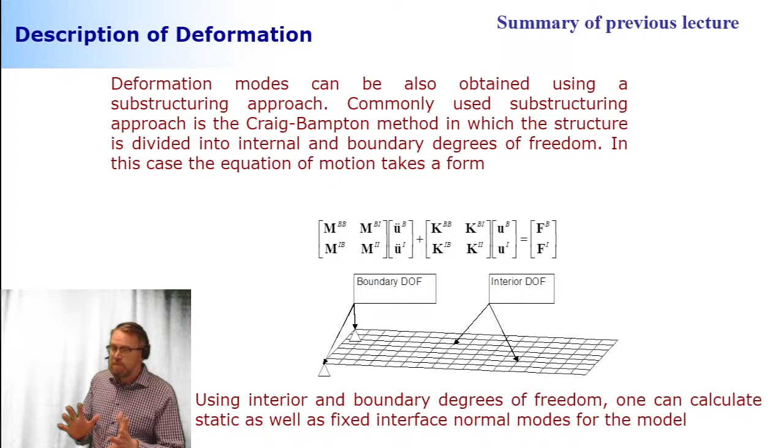Based on the reorganization, it computes two sets of deformation modes that describe the way the structure can deform: static correction modes and the modes obtained by using the eigenvalue analysis. These are described here in this algorithm in our upper left corner.

The first set: you set the point of interest fixedly attached to ground, and then conduct the eigenvalue analysis to see how the rest of the degrees of freedom—the interior degrees of freedom—vibrate when you keep the boundary degrees of freedom fixed. This is the first set of modes you can get.

The second set is the static correction modes, where for each of the boundary degrees of freedom you impose a unit displacement, one at a time. That's the other set. There's a minor, beauty problem—not very significant in my mind, but some people feel it's not good and can't live with it—which is that the static correction modes are not mathematically orthogonal.

So what's the big problem if they're not orthogonal? Well, the big problem is that when you use them to compute the reduced size stiffness and mass, the result is not diagonal.

That's the only drawback. Is that serious? I don't think it is, because what matters more than the diagonal shape is the reduced size. If you can come down from 100,000 degrees of freedom to 20 degrees of freedom, that's what really matters, not so much the fact that your mass and stiffness is not diagonal.

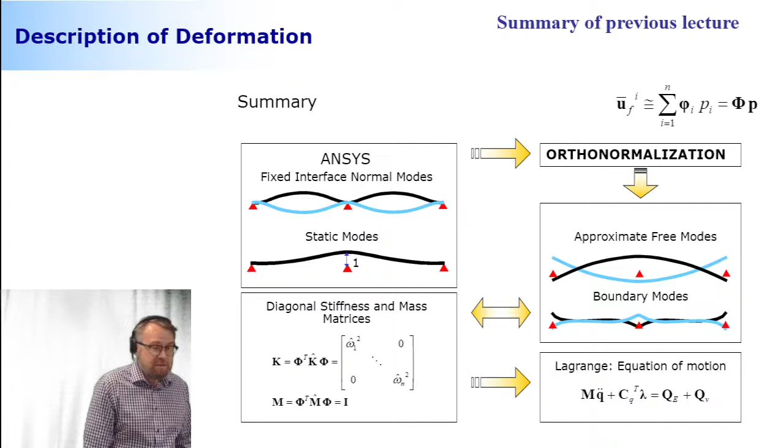Something more chaotic means they have approximate free modes, and then these boundary modes, which are very local deformations associated with the point of interest. Anyway, that's what you can use, and now this is something that's orthogonal. So once you multiply your stiffness, now reduced size stiffness and mass, you get the diagonal representation. That's the end of the story, that's how it goes.

So hopefully this noise isn't bothering us too much. We learned that once you have a flexible body, you can get information about strains and stresses as a post-processing procedure, because what we're computing in multi-body system dynamics is first the modal coordinates. Modal coordinates multiplied by the corresponding modal matrix give us nodal degrees of freedom. Nodal displacements are not yet strains or stresses, but we can use them to get the strains and stresses.

There are two alternatives to make this happen. We can use the modal stress matrix coming from finite element method, and using that information, automatically get the strains and stresses in multi-body software. Or, more complicated, we can take all the forces obtained during the dynamic simulation, extract them, use them in finite element software with multiple load cases, and using those multiple load cases, produce a deformation again in finite element modeling.

This second approach is very complicated, not recommended, but still sometimes used, because the first one, based on the modal stress matrix which needs information about the kinematic matrix, sometimes this information isn't available. Why? Because typically commercial software is used, and it may not give this information openly to users, since the kinematic matrix is typically in numerical forms, not that easy to deal with, so you might not get it.

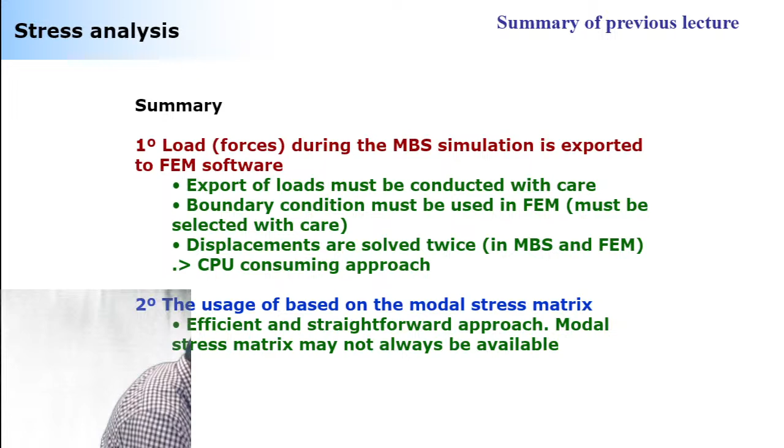So what can we do with that? We can create stress histories, and we can in turn use those in finite element fatigue analysis. Like I mentioned two weeks back, fatigue is a statistical thing, so we can get probabilities about how large a percentage of the details will last under a loading history like this.

It's not that we can definitely say you load this 10,000 times and for sure this is going to cause fatigue crack damage large enough that the structure will fail. That's not going to happen. But a certain percentage of structures similar to what you're looking at will get this damage. So statistics play a role all the time. This is good to keep in mind.

Fatigue is a big problem, particularly when you're welding structures together. And there are two big reasons for that. Actually, there are three reasons, but two major ones.

The first major reason is that because of the welding process itself, you can introduce an initial crack to the welded joint. It's not going to be very big, but for sure there's going to be something there. This is because the welding process itself is not an ideal process. When you take a very close look at a welded joint, you can see something that is not perfectly made, and this acts as an initial crack.

Now, if you want to improve the fatigue life, make the fatigue life longer, the way you can do that is to go after the welding process and use different kinds of post-treatment processes on the welded joint.

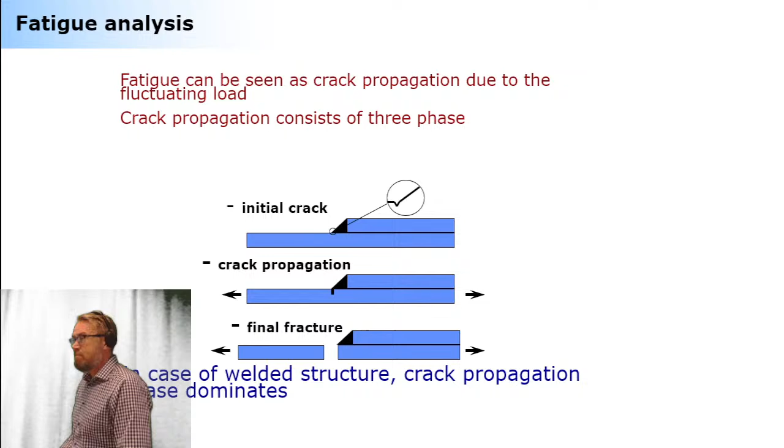Okay, makes sense. All right, then I have an in-class quiz next, and we will get back to this.

In welded structures, this is going to be—it's not on yet, but I'll put it on momentarily. So, welded structures: the fatigue life is dominated by... the dominating factor is crack initiation, crack propagation, or final fracture. Okay, this is easy. So, do you guys want to answer already?

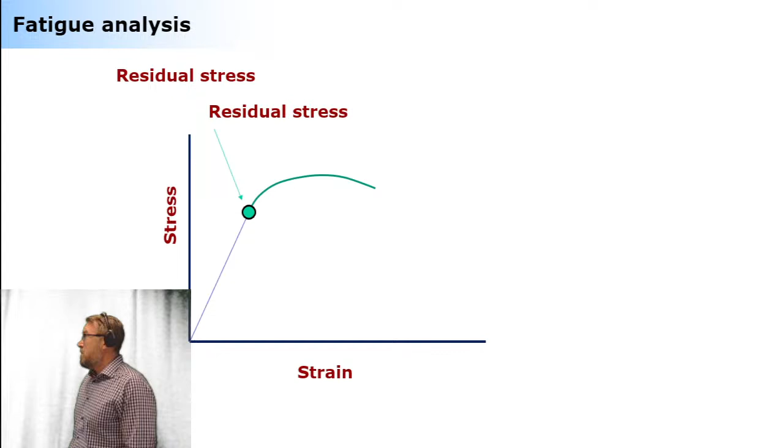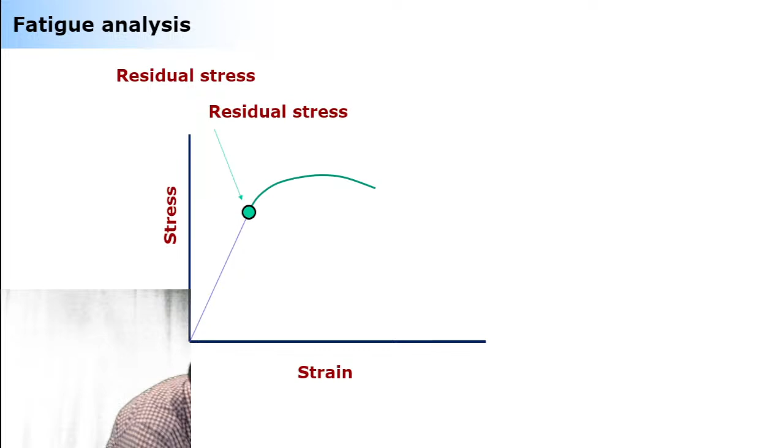This is the situation with conventional steel. How much would it help if you built your structure using ultra high strength steel instead? It helps nothing. Why? Because what happens is you just get this linear line to be longer compared to conventional steel. But that doesn't help, because the residual stress, again due to the violent way heat is introduced into the structure, still pushes you into the corner where linear behavior turns nonlinear.

Again, very locally - you don't see this when looking at the entire structural behavior, only locally. This is a big problem with high strength steel, because fatigue is an even bigger issue there. It makes it possible to build structures that are more slender and lightweight, but then dynamic loading is typically more severe than in bulkier designs. That's why most failure modes in high strength steel structures are based on fatigue, particularly fatigue of welded structures.

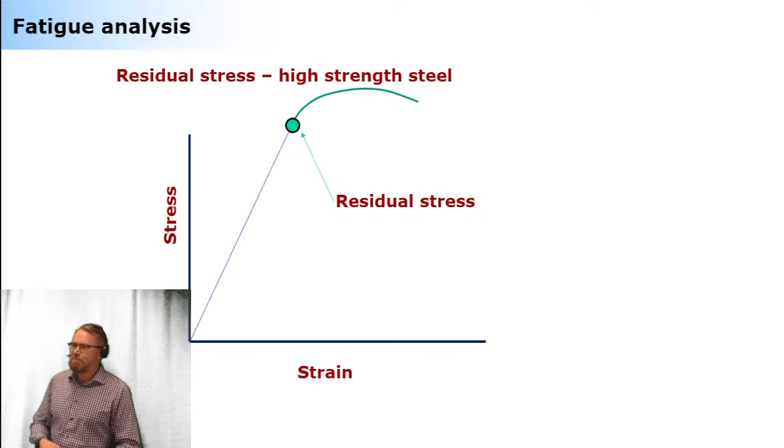So why welding? Do we have alternative ways to combine components? Yes - we can use gluing or bolts, but they're not very affordable, they become expensive. Welding is economically the most reasonable way to go. That's why. You just need to learn the way to do it properly.

This is what I meant about local high stresses, because of this local geometrical non-smooth geometry. If you really look at how stresses behave due to the geometrical change, they are typically higher than the stresses that keep the structure in equilibrium position. These stresses arise simply because of this very local detail.

These very local details are something you need to be very careful with, because fatigue prediction methods are based on the level of stresses you're able to get. If you're using multi-body models to get stress histories, you get the lowest accuracy stresses in terms of local details - these local details being the equilibrium stresses, the ones that keep the structure in equilibrium position.

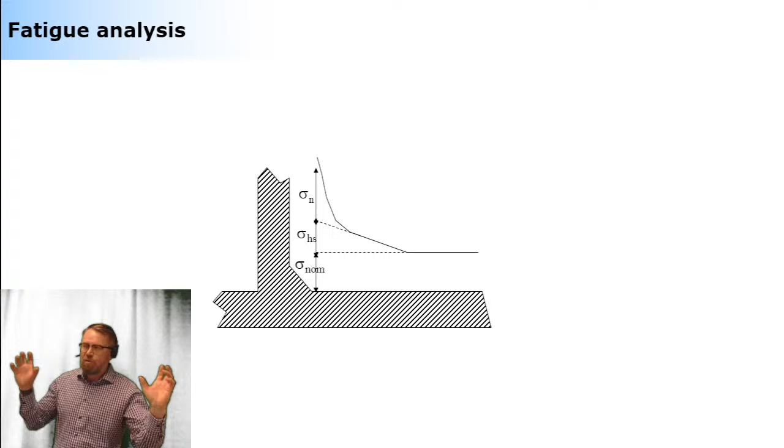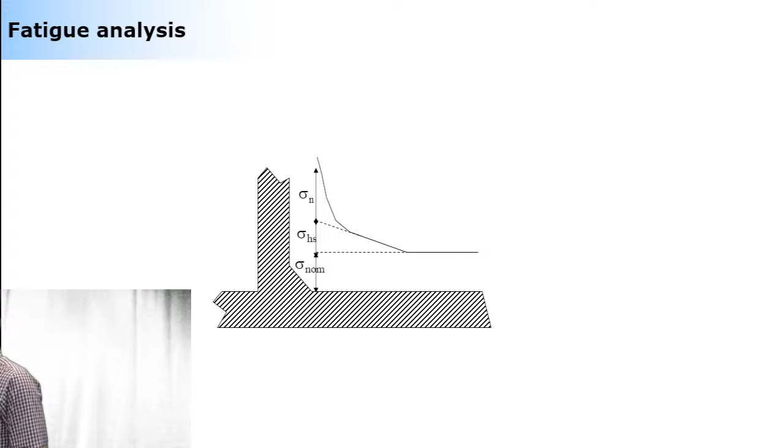But if you take a close look and make a finite element model of this kind of structural detail, with a very fine mesh close to where the welded toe is located, you'll see that the stresses actually become very, very high - almost like infinite numbers. This is simply because of the geometrical nonlinearity you can see here.

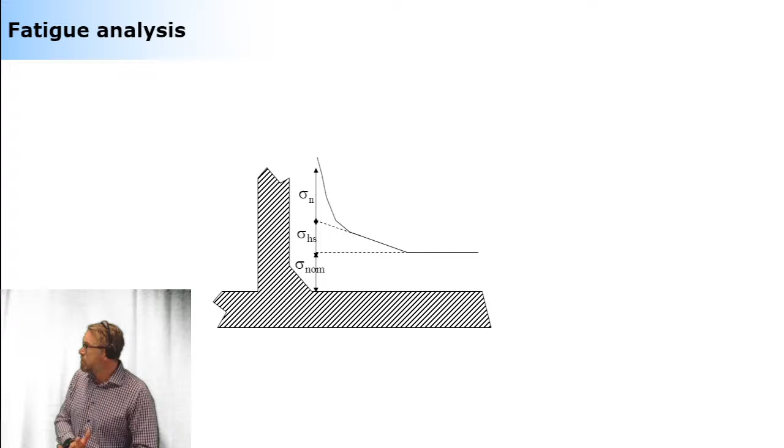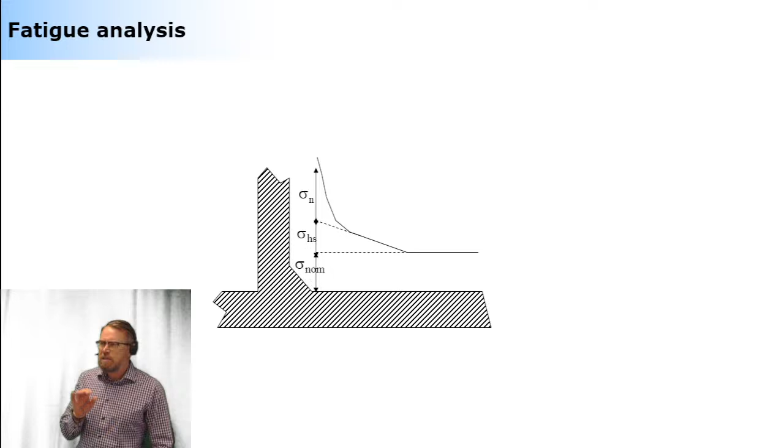Based on the method used - and this university is very advanced in this, with Professor Timo Björk, who specializes in fatigue - they've developed a method to get something that isn't exactly the actual stress applied at the welded toe, but very close to it. It's called hotspot stress, and you can use it for a more advanced, enhanced fatigue life prediction. Or you can get the actual applied stress and use fracture mechanics, which isn't easy because it needs a lot of parameters that aren't always clear, but that's one possibility.

All right, but first things first - this would be the first thing.

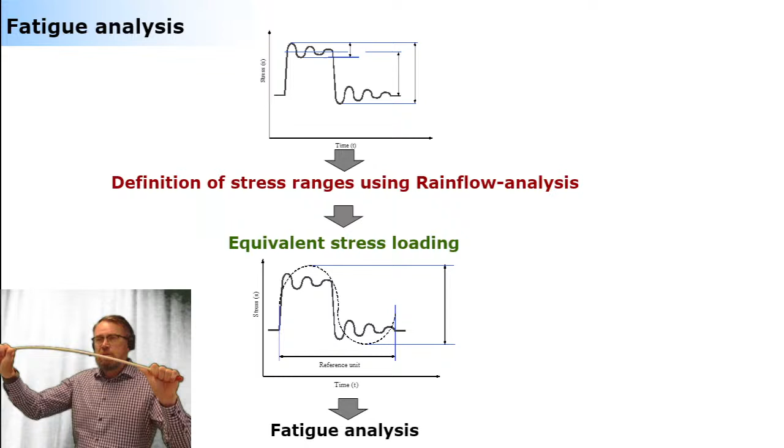You need to know how many times the stress is increasing and decreasing, because that's what matters in fatigue. If you keep your stresses high all the time, that's not so risky. If you keep it low all the time, that's also not very dangerous. But the fluctuation, that's the highest risk you can get - stresses going on and off. This is high risk, because what you need to identify is a range of stresses.

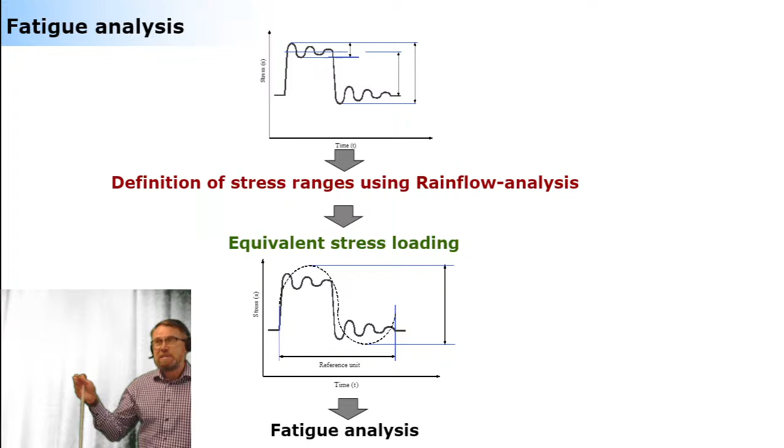This range of stresses you can get by using something called rainflow analysis. The rainflow analysis, as the title implies, involves making a container using your stress history - like a pot or a bowl based on your stress history. Of course it's not going to look like the shape of a cup, but it has a more complicated shape.

Let me see if I can make a drawing for this presentation. No, that's not possible. Why not?

Okay, so this is time, this is stress. Now your stress history is looking like this - let's get started here. It's like looking like this, something like this.

Rainflow analysis is something where you consider this 2D graphic as a container. You put water as much as you can into this graphical representation. So if I put the water here, let's get started - the water level can go all the way up here, here, here, here. So all this is water now. You with me? You understand what I'm doing here?

Then you release the water from your container, saying okay, this is the lowest point that I can find. Let me put a valve here, drill a hole to this container. The water level will drop here to here - this is going to be your first delta sigma. Then you see there's another water level here, so I'm going to make a hole here too. Again your water level will drop this much - that's another delta. But there is water left here and here.

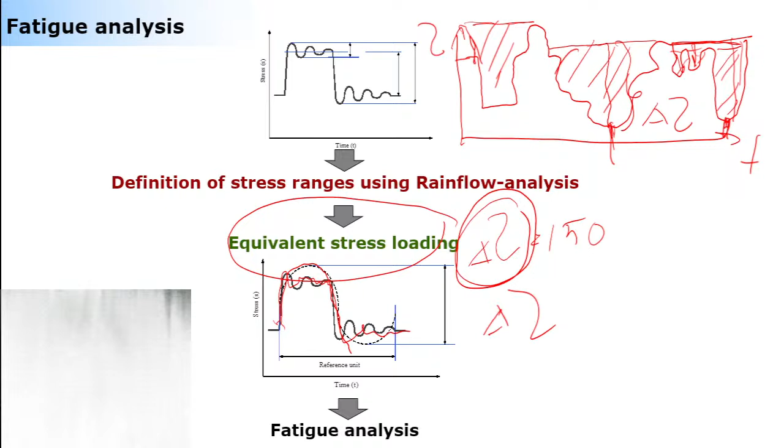Now there's another formula that once you have figured out all these deltas, it's going to replace all your deltas by one single delta value, because fatigue life experiments are always carried out using constant stress amplitude. They are never made using this kind of variable stress amplitude, but always a constant stress amplitude. So to be able to use this experimental information, you need to convert this history that consists of small stresses and large stresses, or delta stresses, into one equivalent delta stress. That's it.

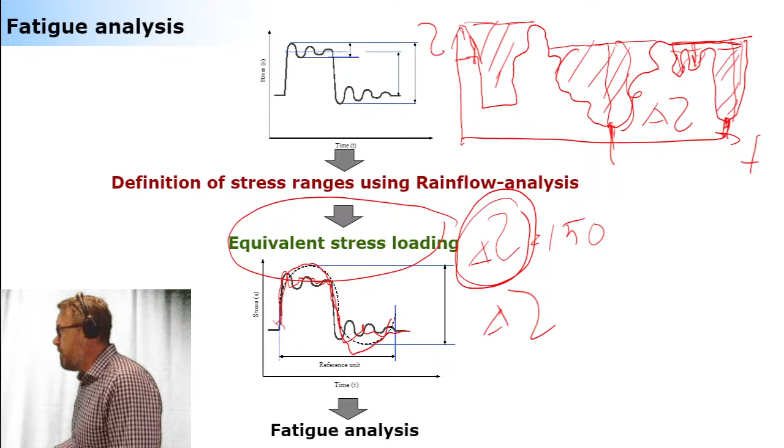And now this one delta could be corresponding to hours, working days, minutes, whatever you want. This is information you can use to start computing how much fatigue you have in your structure, or how much fatigue life you have left in your structure. That would be a better way to say it. Now you're ready to go to fatigue analysis. But this is something that you must do. Were you able to follow me? Okay, good.

Then you got this. You get these nominal stresses, so you get this equivalent stress history. This is what we were able to compute by using the rainflow analysis and equivalent stress computation. And then if you use these stresses that you can get directly from multi-body system dynamics, then you use a method that is based on pre-calculated tables and experiments.

These are like you're looking at your structure and comparing that to the ones you can find from standards. And if you find them to be close to what you have under investigation, then you have a formula to compute the fatigue life for that particular detail.

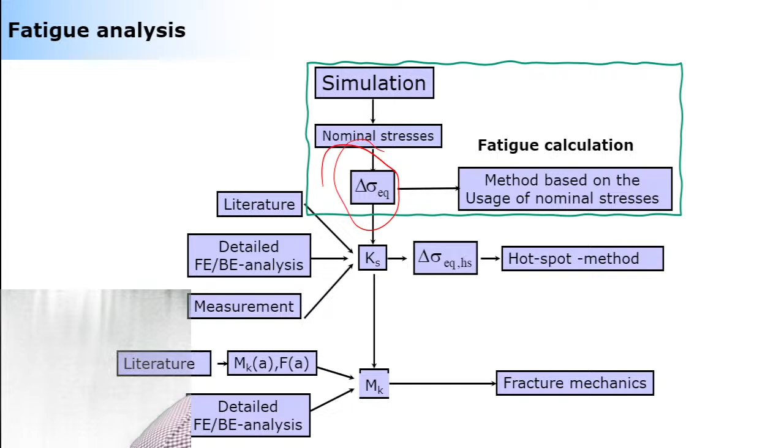And if you wanted to do something more sophisticated, you need to get more information. And if you wanted to use these hotspot stresses, then you can use detailed finite element models or boundary element models or measurements to get the parameters that give you a more accurate estimation of what exactly happens in your local detail.

Or if you really want an accurate prediction, then you can use something called fracture mechanics. But again, you need to get more parameters to make sure you can accurately predict what happens at a very detailed level of your crack growing process. That's what it is. Let me show you an example.

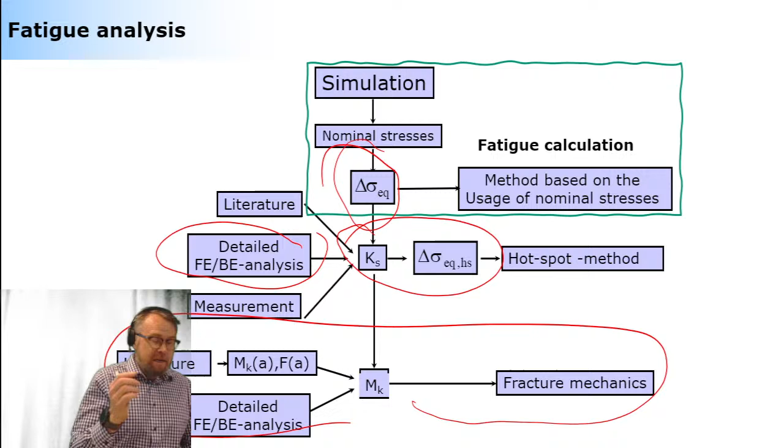This is an example of this crane we have looked at numerous times. This is a flexible structure where there's a payload, three hydraulic circuits, and each of the bodies is modeled as a flexible body to make sure we can get the stresses out. All right, so that's the procedure.

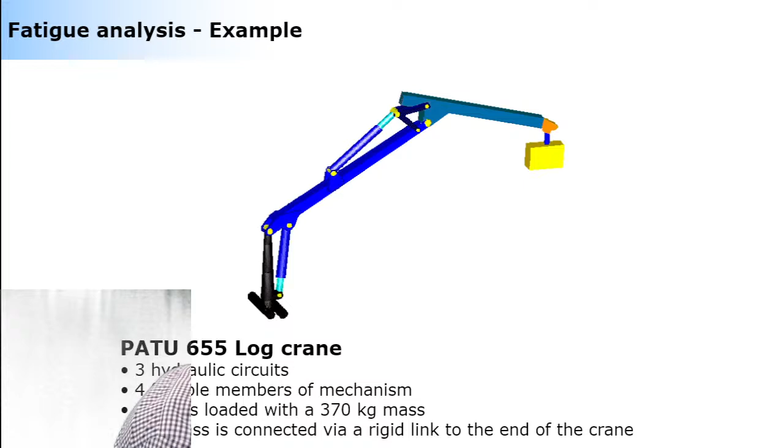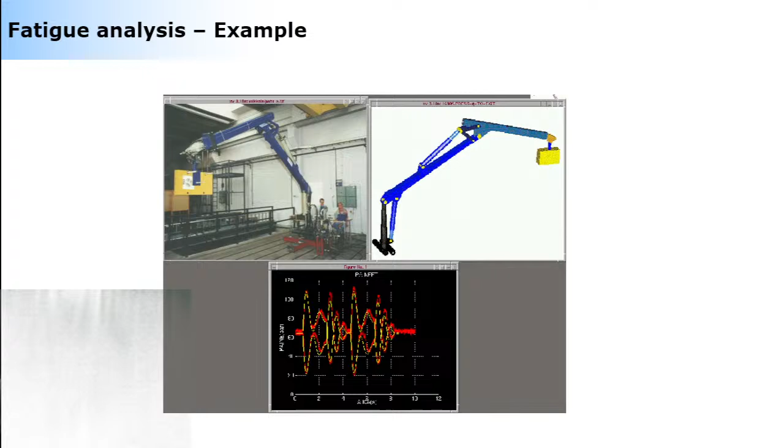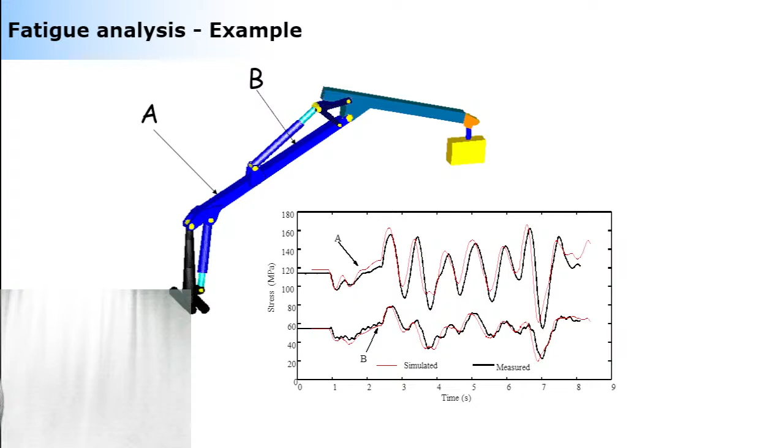So you need to pick the locations that you're interested in. This is what makes it difficult because, like I said, there is so much welding in structures that you cannot look at all of them. You need to use your engineering sense to pick the ones that are probably the most significant. That's how you develop your engineering sense. Two locations: one here in this lift arm, another in a lift arm, but this one, A, is extremely harmful because the stress history here is already pretty severe. So it's experiencing very heavy stresses.

When you take a close look at this, there is a very harmful design detail located exactly where there are high stresses. This design detail is this kind of knot used to make sure the hydraulic pipes can travel to this cylinder. These knots could be located anywhere you want, but unfortunately this designer selected the point that is the riskiest position. Why? Because this point is loaded the highest in the entire lift arm. A lift arm is typically where the highest stresses are located. So, the worst of the worst, you put the knot.

And you can put the knot, because again, it's about how to make the hydraulic pipes connected to the lift arm so they are not loose. You can put it anywhere you want, but not in the place that is highly stressed.

I'm sure you want to know what happened after that. Of course, there was a fatigue crack growing in this particular location, because you need to consider welding as your best friend and worst enemy. Best friend, because it's an affordable way to do any kind of connection, including the bolt connection here. Worst enemy, because this is where the crack is definitely located at, the initial crack. And if you put your initial crack in a location with high stress history, this is not going to end well. And that's exactly what happened in this case.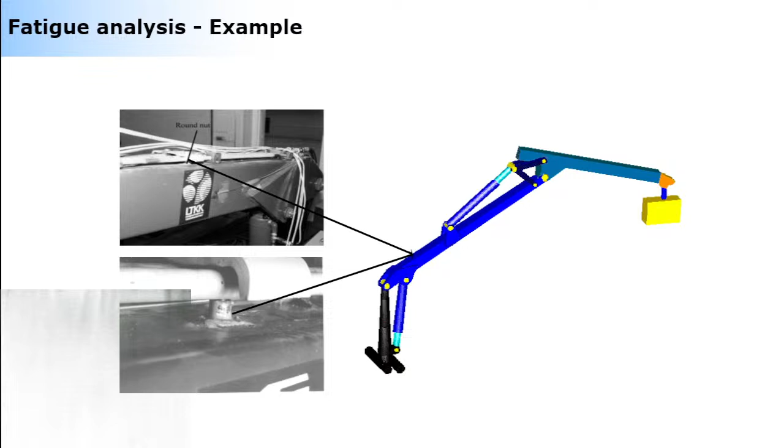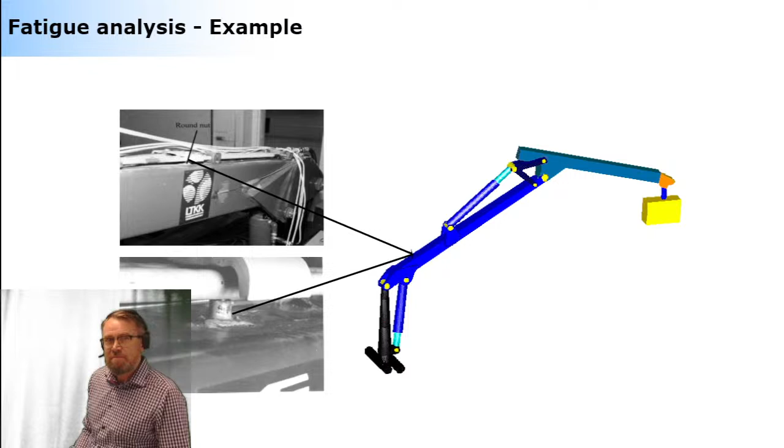Painting doesn't help. It's like if you have a not-good-looking wall, you paint it, and it's not going to make your wall look good. Okay, all right, so that's it. That's the end of the story.

So another question: fatigue of the welded structure can be improved by using high or ultra high strength steel, using painting or another finishing technique, or using post-welding treatment techniques that remove the initial crack.

All right, so Alt Tab. Yep, yeah, that's what I'm trying to do. Okay, I got 19 answers already. Where is this window? Is it here? God damn it, I still don't see where this is. I want to show the results. Where? Oh, there. All right, so is it going to be or is it not? Not. What? Yeah, it will be 100% because there are 19 answers, and each one of you is following my explanations, right? No comments. Close, but still no comments.

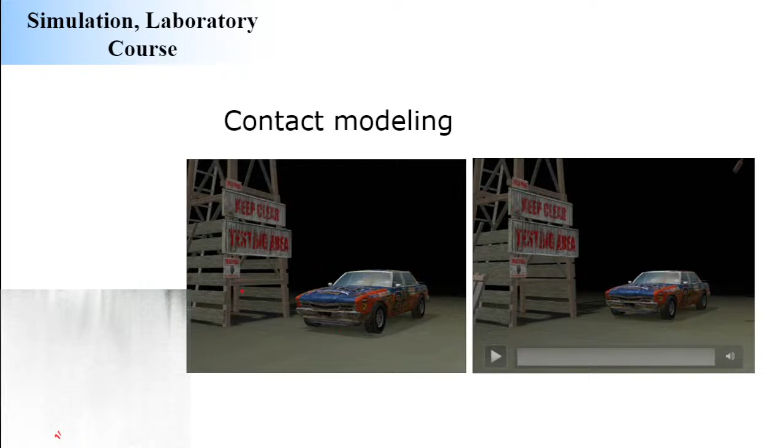Something wrong in this animation. Yeah, I think it was a problem in another contact. This is from the rally game, and they're just demonstrating how good their contact models are. And look what they did - some of these contact models are made in a way that they can introduce damage. So it's not that you just hit something and that's it, like is typically the case, but you can introduce some kind of damage to your car. And of course, they are pre-calculated damages - it's not that you have a random contact and get damage based on that, but they are pre-calculated, which is still okay.

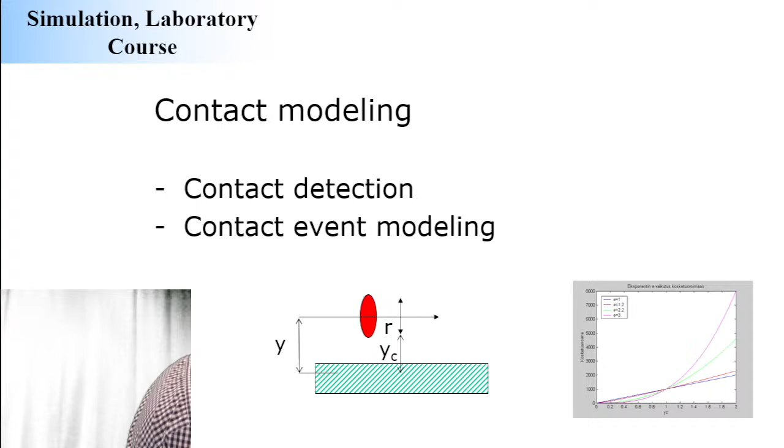There is a technique that is commonly accepted to be state of the art, called the bounding box method. The bounding box method itself has a lot of varieties, but the concept is quite simple. It works in a way that you use boxes to predict where there's a possibility of contacts. These boxes go in different levels - you can get started from very big boxes.

Again, let's think about the rally game. So you have a big box that is big enough to put your rally car inside - that's your first box. Then you have separate boxes depending on where you're driving your car. There could be another box representing the house, and the house is far off from where you're driving - let's say a kilometer off. There are other boxes that are maybe closer to you, let's say each of the trees is under a box. Now you're measuring whether or not you're close enough to big boxes that there's a possibility to collide.

And if the answer is yes, then you move on to the more detailed level. So you're comparing, okay, I think this is a better example than the car: the crane that is used to move containers from harbor to ship and back.

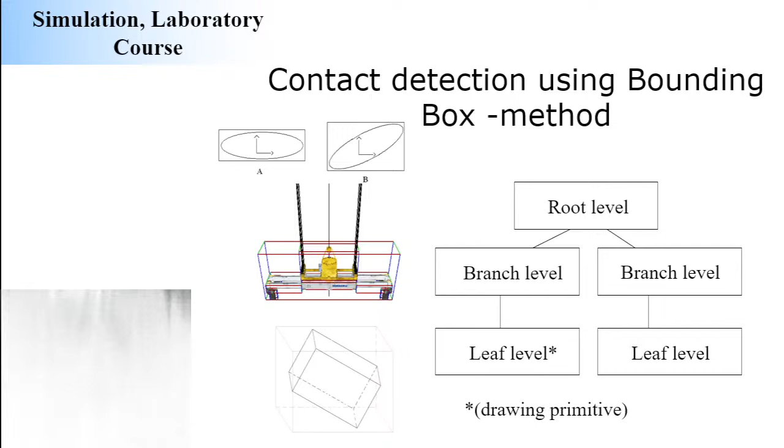Then inside of the big box, there are small boxes, let's say, for each of the drawing details. So these are the closing mechanisms, and they are under one smaller box. Now you're comparing whether there's a possibility the smaller box is colliding with corresponding smaller boxes in the ship. And if again the answer is yes, you move to the last level.

The last level is already the drawing primitives. You're looking if these drawing primitives are actually colliding, and if the answer is yes, then you move on to contact event modeling itself. But this is how it works.

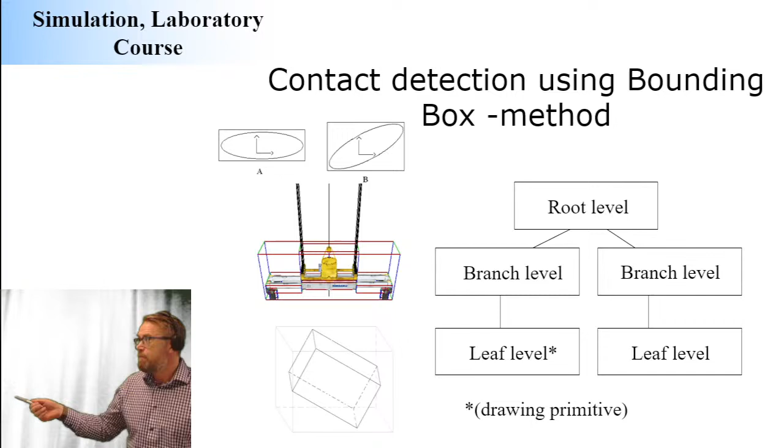The varieties are coming because there are different ways you can put the boxes inside of your system. You can use, as you see here, axis-aligned bounding boxes, oriented bounding boxes. Each comes with certain advantages and disadvantages. But again, the concept is simple, based on bigger, medium, and smaller boxes.

That's how it's behaving, and this saves a lot of computing time, because if you think about it, there are a lot of different contact possibilities even in this harvester crane. You need to check if each of these contact possibilities is true or false. That would take a lot of computing and use all your CPU energy, which makes no sense. That's why you save a lot of CPU by comparing these big objects first, and if the answer is no, that's where you stop. No further computing needed.

All right, so this is the first step. Then comes this interesting second step.

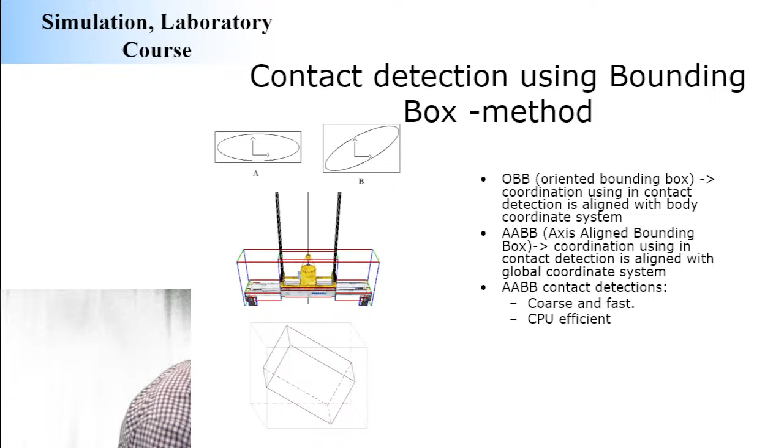But you understand that in game technology, for most multi-body applications, this is not possible. This is not the way to go, because if you model each of these details as flexible bodies, of course you can get a very accurate description of what happens in contact, but your CPU need is enormous, and you're not advancing well in your simulation. That's why in most cases you assume your body to be rigid.

And you kind of pretend the flexibility within your rigid body. Pretend the flexibility within the rigid body. This is what you need to do in most cases. Now you have two choices to make it happen.

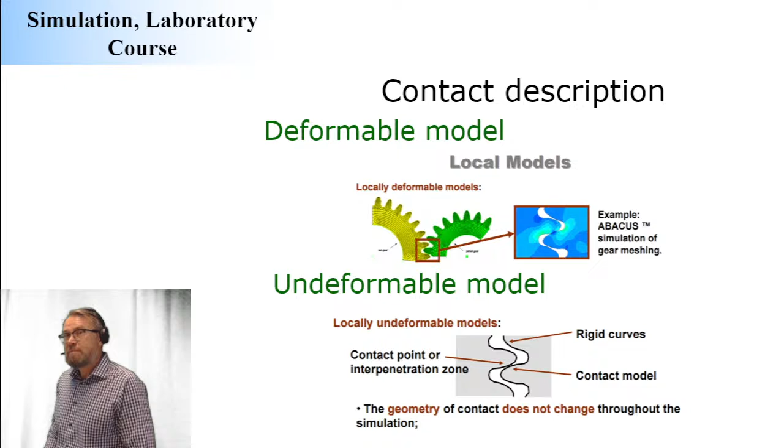These two choices are based on penalty forces or something that is a cone complementary approach. Penalty force is that you pretend the flexibility. That's the way you allow rigid bodies to penetrate with respect to each other, and this penetration is used to create the forces that separate them from each other.

So the penetration, in real life, that's not going to happen. Of course it's not going to happen. So if I have this remote and my phone, and I make them collide, they don't penetrate, because in real life they are flexible bodies. There's this surface that is bending a little bit in my phone. This surface is bending a little bit. So this is what happens in reality.

But when we're modeling them, the first choice is to use the penalty forces. The penalty forces will be based on indentation, which is like imaginary flexibility, where they are kind of penetrating each other like this. And based on the amount that they are superimposed, I'm pushing them away from each other. That's how it works.

This alternative—when you read the stories and hear something called smooth dynamics, it means that the contacts are modeled using penalty forces because they are smooth. They are not violent, rapid things. They can be somewhat violent, but they are still like smooth dynamics.

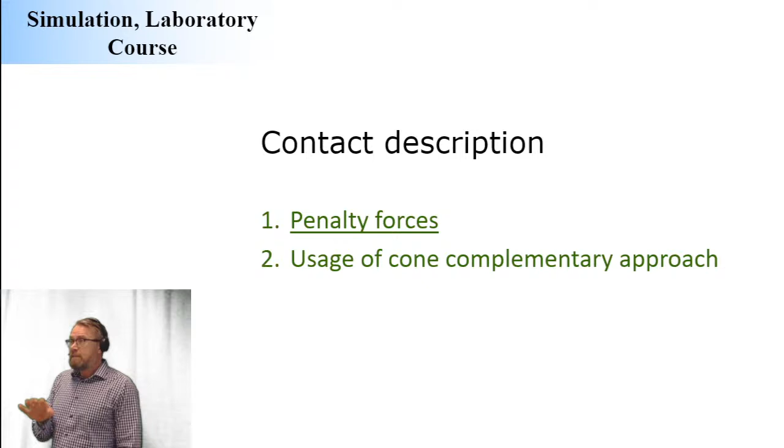All right, so penalty—very simple concept. It's like this: you have a ball that is coming into contact with a surface, and these geometries are overlapping. Based on the amount of overlap, you introduce another force component, pushing the ball away from the surface. Simple as that.

But typically you need to use a few tricks to make this happen. First, you need to be very careful with your time stepping, because it's possible, particularly when you use variable time steps—let me take this remote and the phone—that there could be a remote located here. Let's say my phone is a surface made out of concrete.

This penalty force is typically based on the material properties of the bodies that are overlapping. So I have my remote here, and you compute it to be here in the next time step, and in the step that follows, the remote is here—so it's this much deep under the surface made out of steel, let's say. And I'm computing the force to push this remote away from the steel, and it's like 20 centimeters inside the steel material.

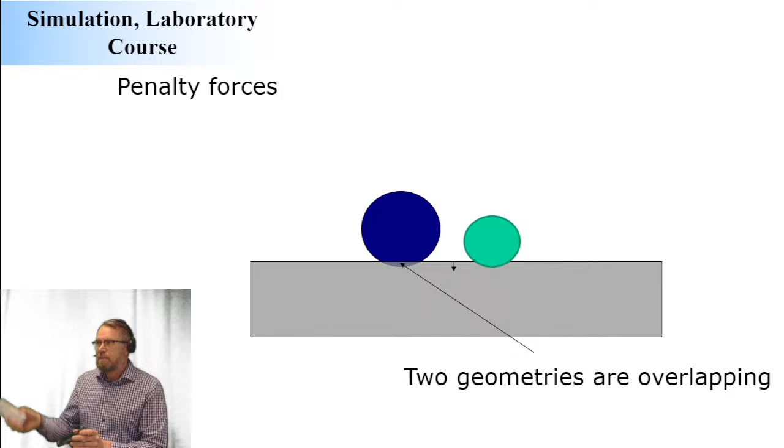So the force introduced is going to be huge, and this remote is going to fly so far that I'm never going to see it anymore. That's not going to happen in reality. So this method is somewhat sensitive to time stepping and integration settings—you need to make sure it understands you're getting close to the possibility of contact, and not put excessive amounts of penalty force. The penalty force is supposed to make sense only if it's smooth as well.

Smooth means that the equation to compute these penalty forces is very simple: there's the stiffness based on the bodies that are colliding, in contact, and x is the penetration. But typically x is raised to a power other than 1, because if you have 1 as the exponent of x, then the point where contact just takes place is non-smooth.

This is going to be difficult for integrators to understand. So what you wanted to do instead is make them smooth, like an n power function, where n is equal to 2. Now it's smooth, so your penalty forces are progressively increasing as the geometries become more and more overlapping.

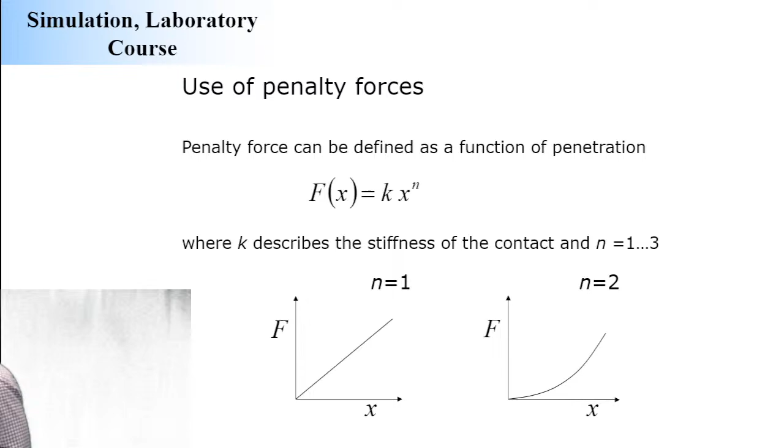This is smooth all the time, so not idealities, but not this kind of step that takes you from 0 to the increasing line. This is progressive, so it's much more pleasant from a computational perspective. All right, so this is how it works. It's pretty simple, not too complicated to model.

Very often used. Here's an example. I mentioned earlier today one professor, Timo Björk. There's another super famous professor in our department, Jussi Sopanen. When Jussi was younger, he made software about bearing modeling, because his life is always about bearings and rotating shafts.

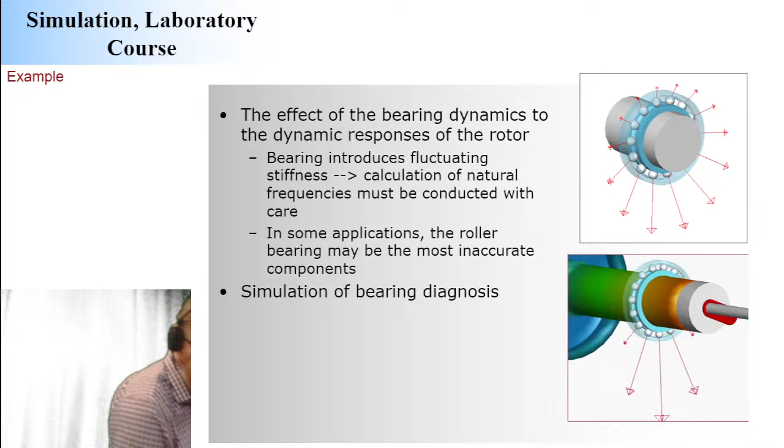He made a bearing model based on multi-body system dynamics, and this was again based on penalty forces. Still, it was a somewhat good bearing model, based on computing the penetration of each of the balls with respect to the inner and outer ring. Based on that, you can detect how much force is imposed on each ball. The model from this study looked like this. It's not too complicated, again based on this simple thing.

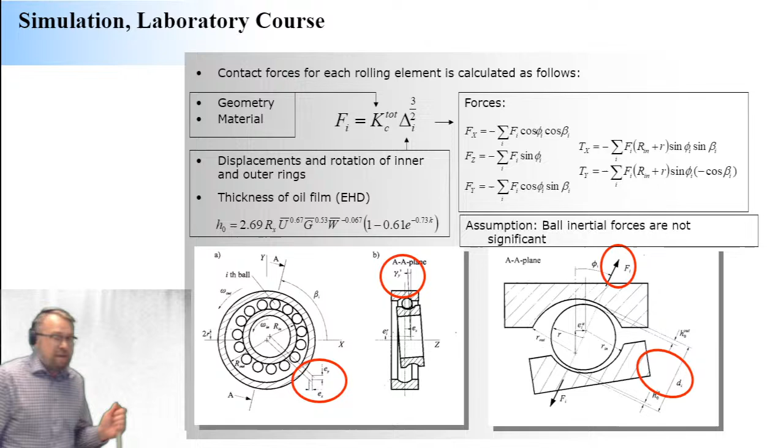You have this stiffness, remember we looked at the penalty formulation earlier, so it's the stiffness times the penetration, and the penetration is to the power 1.5 to make it more smooth. Simple like this. Of course, what is difficult is computing these penetrations, but there is a geometry to make it happen. This paper, made a long time back, is the most cited paper in my career, and Jussi's career too.

We made this together, some years back, more than 20 years back. Anyway, this was based on the penalty formulation, describing the bearing behavior.

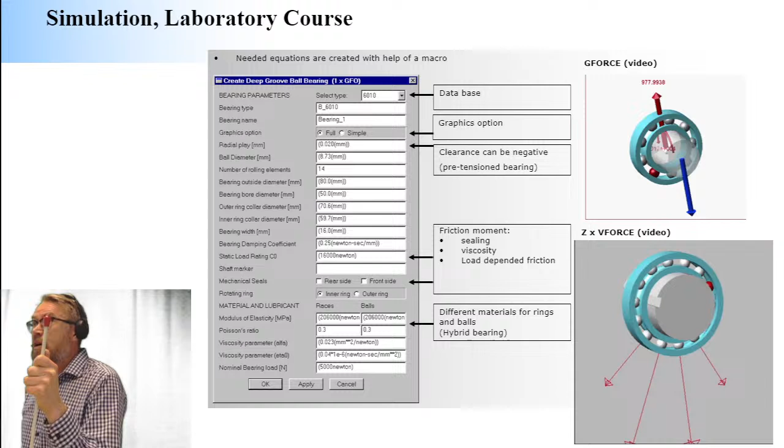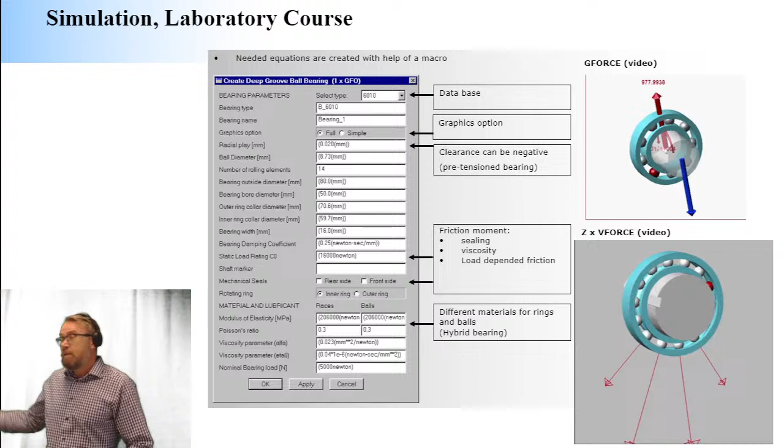Using this bearing behavior, you can introduce unidealities to your inner ring and outer ring. You can introduce different kinds of pre-loading conditions and so on, and get a better understanding of the faults as well, a better understanding of how the bearings are behaving.

This is a good example. You see here a shaft, and there's a mass, there's just a force at the end of the shaft, and the force is constant all the time. When you look at the reaction forces at the moment, they are fluctuating all the time. Really? How come?

Well, because of the bearing behavior - sometimes the force can travel exactly through one ball, sometimes it's traveling through two balls. This kind of behavior causes fluctuation, not significant, but you see the fluctuation all the time. So it's not constant, as the loading here.

And then, of course, different things, different kinds of plays. Is Mustafa coming already?

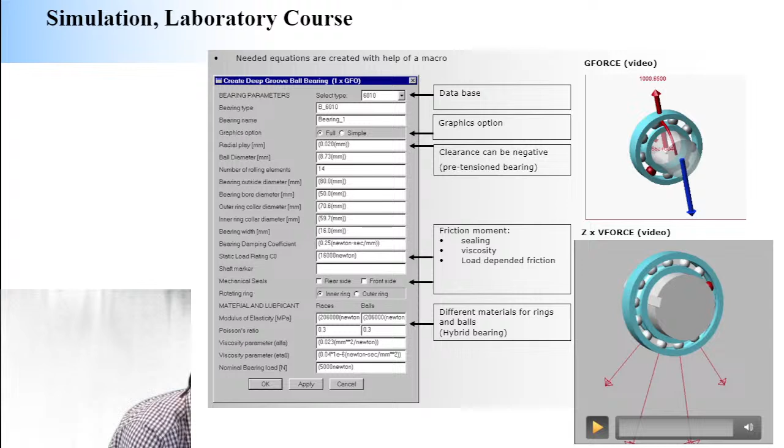Okay, I don't remember what the deal was about this, but you can put a triangular inner ring, and you see how the forces are introduced, or a crack in the inner ring, with the crack pointed out by an arrow. I'm not willing to play this video, but that's how it works.

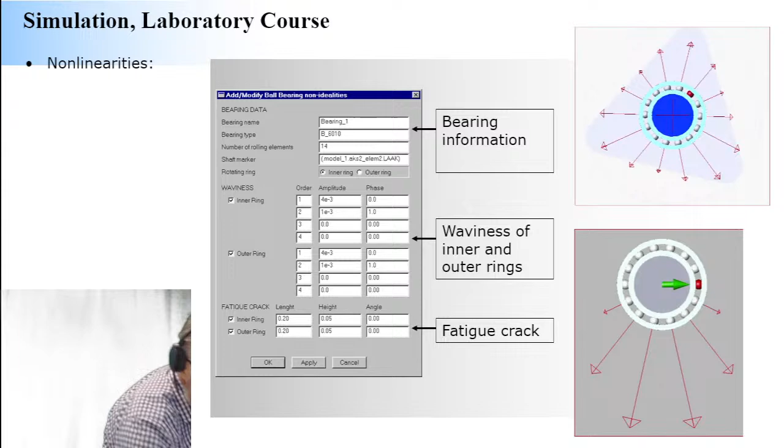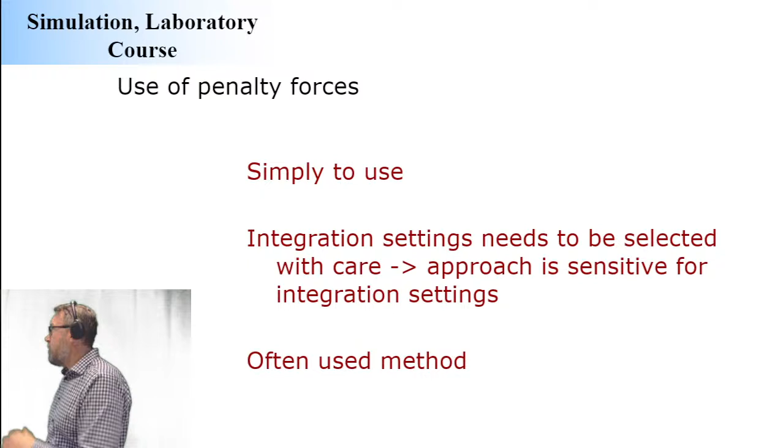Penalty forces, let me wrap it up. Penalty forces are simple to use, you just need to be careful with the integration settings, and it's very often used as an alternative. Contact force can be described using penalty forces. The drawback associated with this method is that damping is difficult to describe, multiple contacts are difficult to describe, and the method is sensitive to integration settings.

Yes, I know, but still, it is what it is. Okay, all right, so let me take a look at this one.

All right, success rate of this. Last time it was 83, if I remember correctly. 90, 90? 89, 89, 89.

I'm saying 100. You said 80, 90, 95. All right, 95. All right, one more, which is this one.

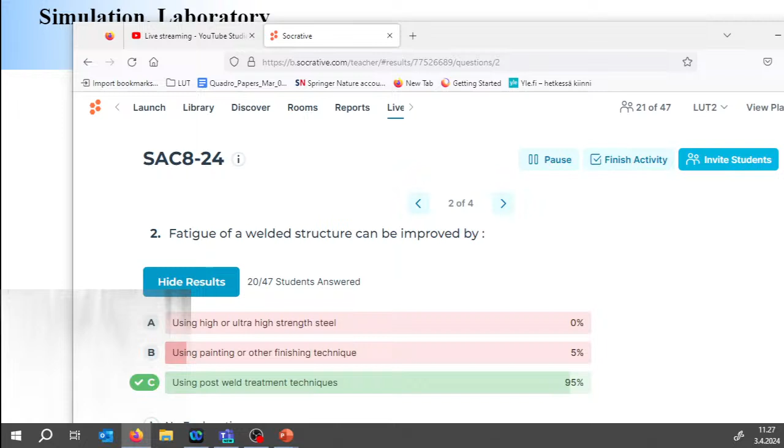Contact forces can be described using penalty forces. A drawback associated with this method is... and I'm going to take this off, like this. I will continue with my story because there are just a few slides left.

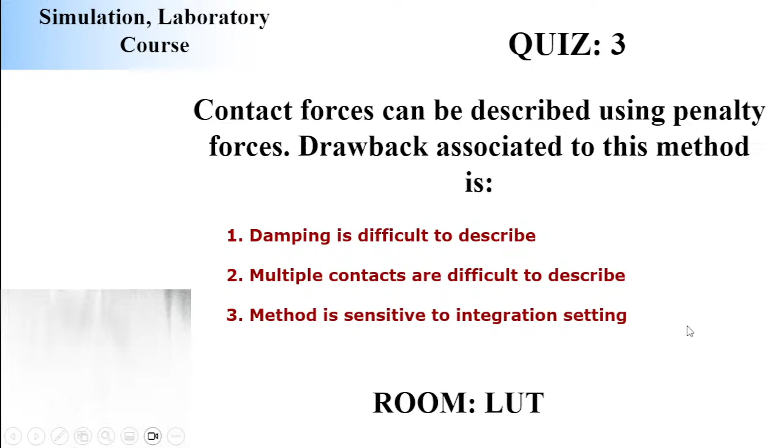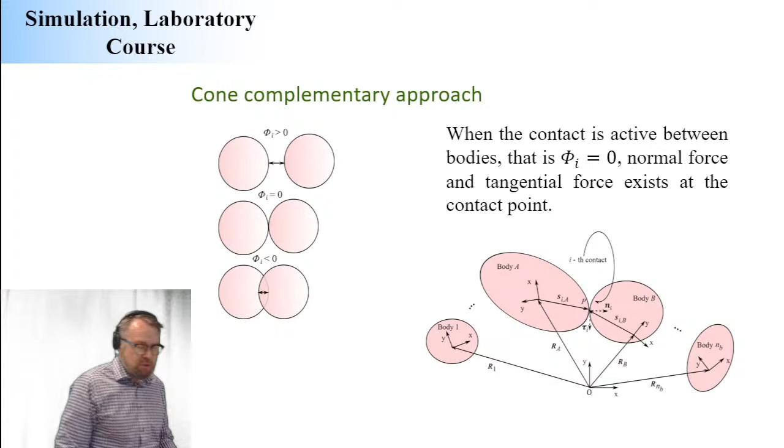This is a cone complementary approach. This is conceptually very different. You can change the entire equation of motion because you can look at these geometries and create inequalities, like constraint equations, that predict or prevent penetration.

This is somewhat lengthy, but the story is pretty much like you see here. This is your inequality, and that's what you take into account in your equation of motion. This involves entirely different mathematics. So this is still within the framework of multi-body system dynamics, but with a special, definitely special feature.

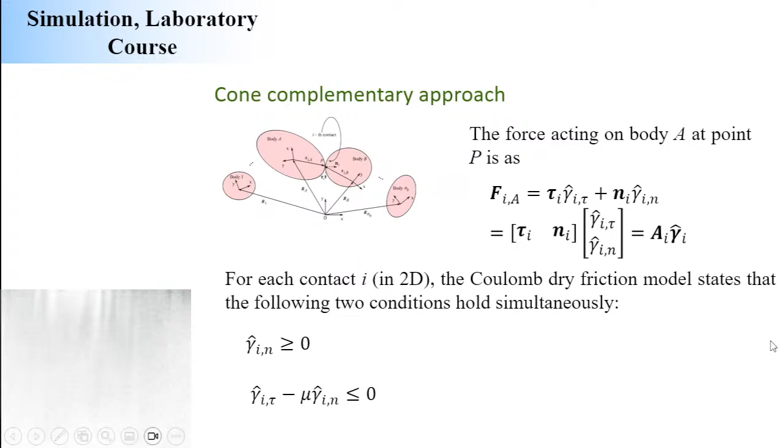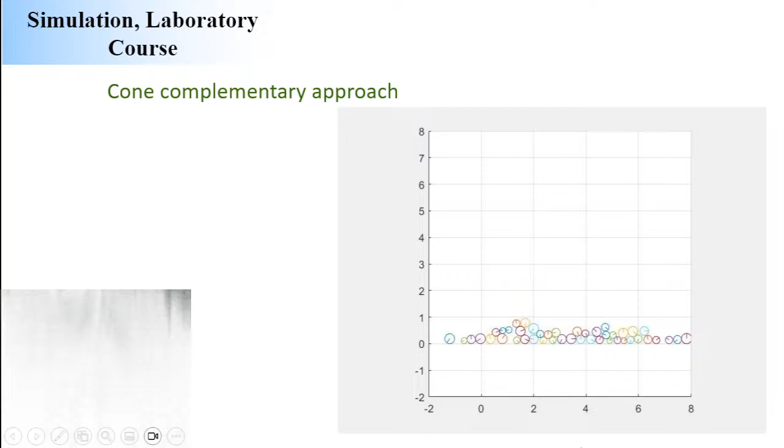These are based on the cone complementary approach. Who is really good at this is my good friend Dan Negrut. I want to play a video made by Dan. I think this is kind of nice. Let's see how this works. This is from YouTube.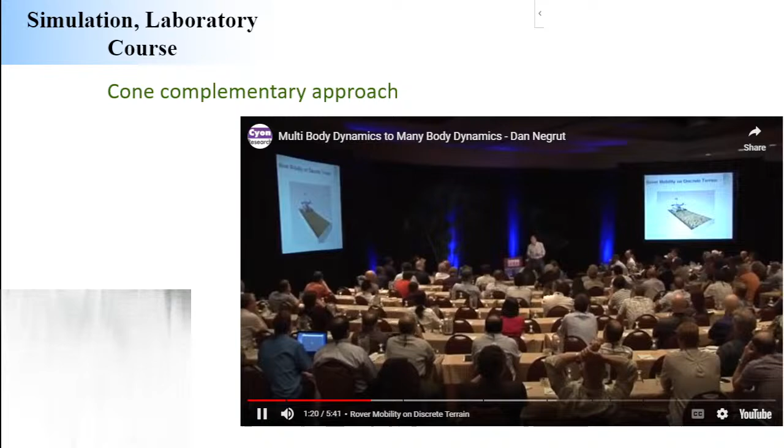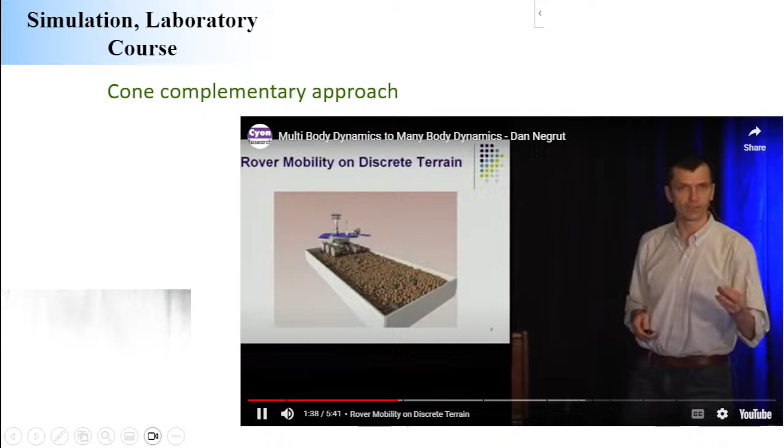What I'll do is send you a link so you can take a look at this later. This is about many-body, terminology that was developed by Professor Dan Negrut.

Many-body means you have a lot of possible bodies that can collide, and when I say a lot, I'm thinking millions of possibilities. This is something you cannot deal with using smooth dynamics, it's just not computationally possible. This too is computationally intensive, but it keeps the promise that one of these days you can run these in real time. I don't know when, somewhere in the future, but you could run these in real time.

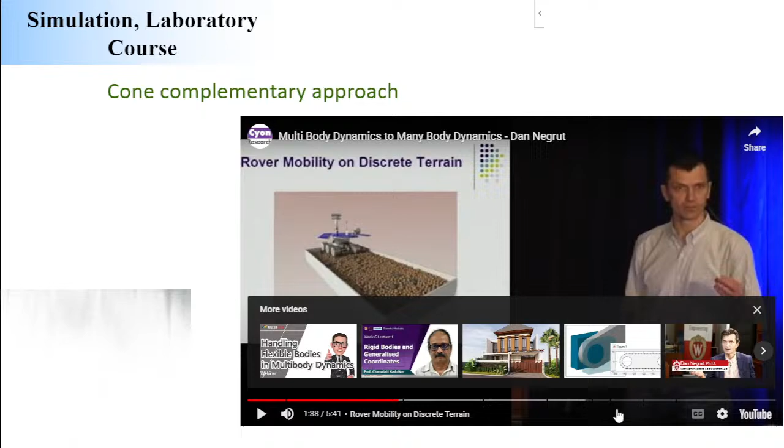Oh, hold on, don't go yet, don't go yet, this one. So how much, what's the success rate here? This, by the way, is really nice. I don't need to turn this on and off all the time, I can use the same settings all the time. Good that I figured this out. Or was it me? Maybe it wasn't even me. So Mustafa, I know how to deal with this now, I can give you a lecture on how to deal with this.

These settings, now the settings are the best ever. All right, the contact force success rate is 76. Not bad, not 100, but not bad.